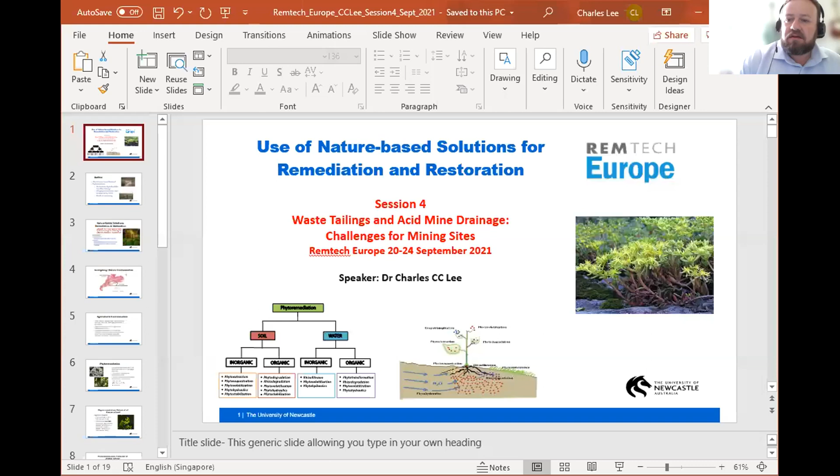You can stop sharing now. I would like to ask Dr. Charles Lee.

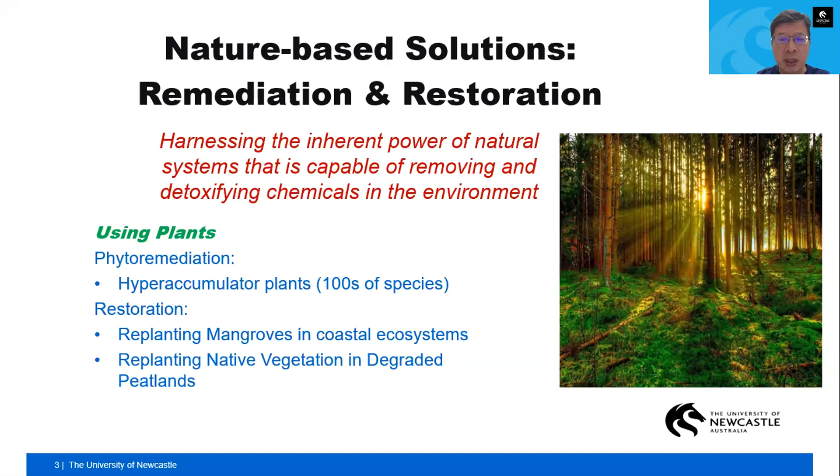The other part, restoration, which I don't have time to cover, is basically restoring damaged ecosystems. We are in the decade of ecological restoration from the United Nations Environmental Program, replanting mangroves that are heavily damaged from urbanization in coastal ecosystems. There's also work on degraded peatlands, especially in Indonesia, damaged from burning to plant oil palm plantations. We are replanting native peatland vegetation to restore the peatlands back to something usable. We'll focus on phytoremediation in this presentation.

We'll move quickly to China. A hot topic is in Guangdong province, a very large province in southern China. You must have been to Hong Kong, crossing over at Shenzhen, where Dongguan is, where most of your phones are made. Now we will go to the northern part, the northeastern part, where all the mines are. They've been around for hundreds of years, very old mines, and we have lead, zinc, and cadmium contamination for a long time. The other metals we find are in the Pearl River Delta.

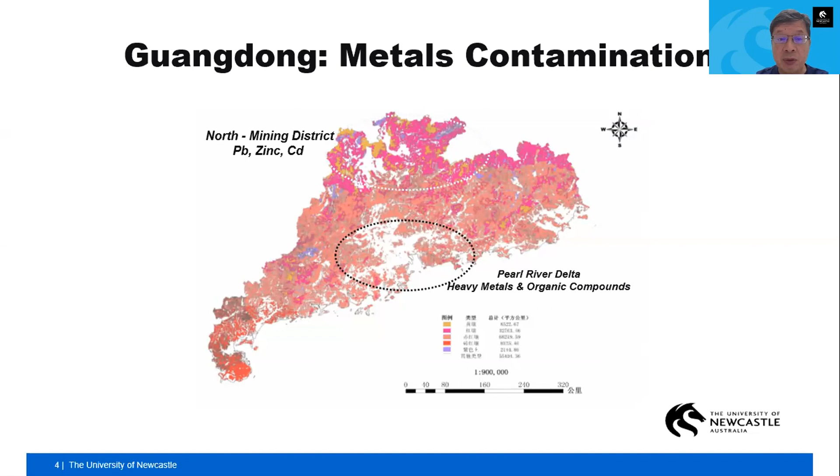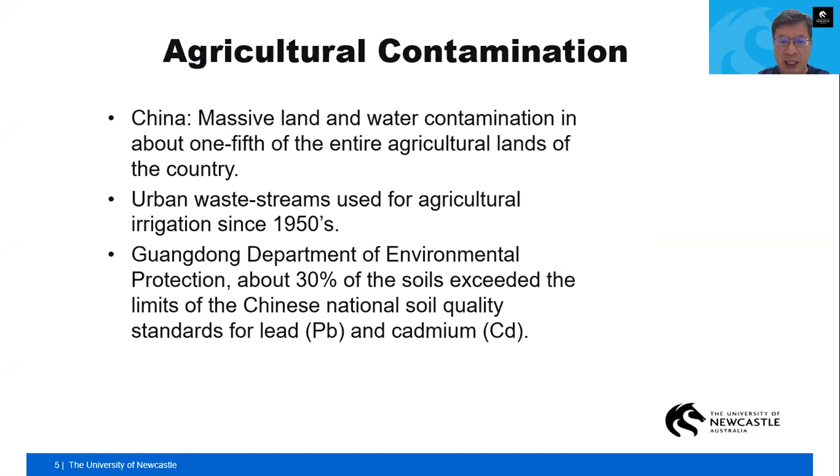They're mostly from industrialization, so we're moving up north where the old mines are, and also where there's agricultural fields. Unfortunately, in China it's estimated that at least one-fifth of the agricultural lands are contaminated, land and water, from urban waste streams, from irrigation back in the 1950s. The Provincial Department of Environmental Protection says about 30% of soils exceed the Chinese national soil quality standards for lead and cadmium. Very, very serious problem.

For this case, we are looking at hyperaccumulator plants. For those who are not familiar, they are basically able to accumulate about 100 times more metals, for example, than non-hyperaccumulator plants. So if one was to select these plants, they do not die from toxicity, but can uptake it.

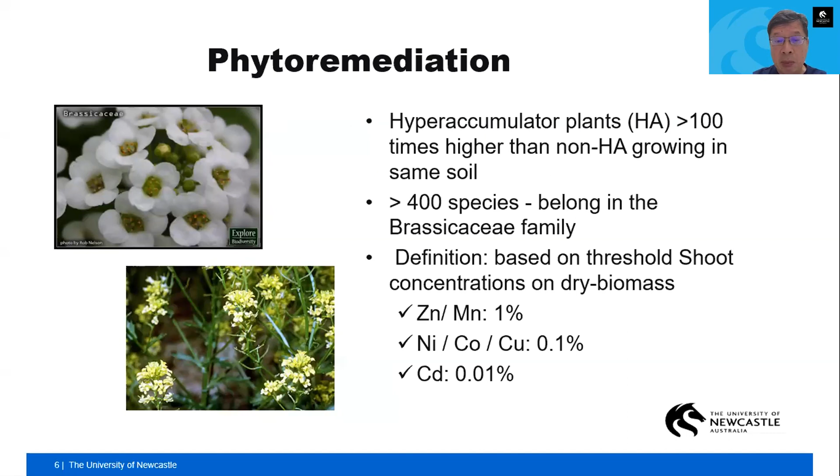A lot of the species belong to the Brassicaceae family. Again, when you test the shoots, the dry mass zinc and manganese can be as high as 1%, which is 10,000 ppm of these metals, and 0.1% to 0.01% for others—very, very high concentrations, but yet the plants are surviving. So these are really amazing plants, given by God for us to use.

This particular Sedum alfredii is a fern-type plant that is used in our remediation. It was found as a mining ecotype. So when we went to the mines, they are acclimatized to the high concentrations, and it grows in higher kind of regions, native to China, Japan, Korea, in the moist forested slopes, from 2 to 30 degrees, quite a range of temperature and elevation.

Originally found in the Zhejiang province, which is just next to Shanghai. Way back, the mines have been operating for 300 years in the Ming and Qing dynasty, extracting lead, zinc, silver in those heavily galena sphalerite ores.

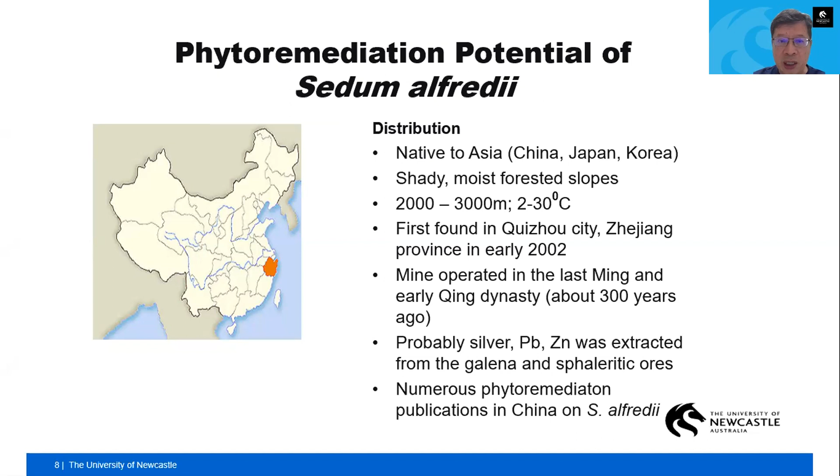It's not uncommon to find a lot of publications on using this fern for phytoremediation in China. When we look to be practical, you can't get all the farmers just to get out of the farms—they need to continue living in the villages. So the best way is to co-crop the fern with the maize or corn, and it does increase the phytoextraction of the metals in co-cropping.

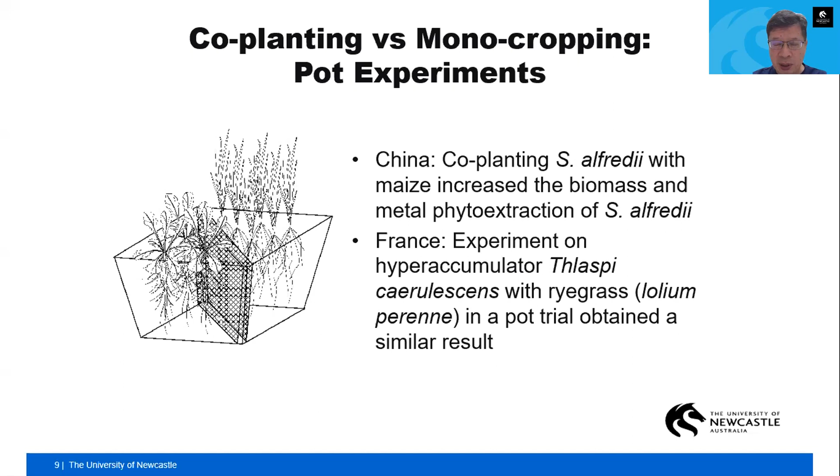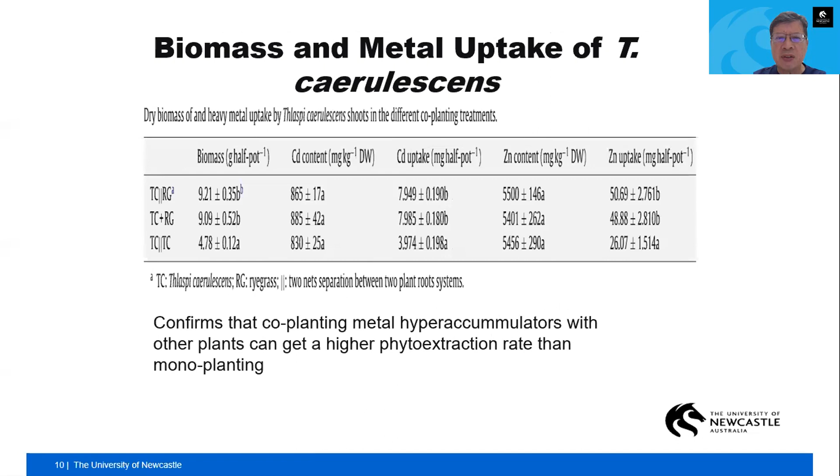Now, phytoremediation, we know, is nature-based. A lot of times we do not have the luxury of time and we want to get rid of contaminants quickly, not surprisingly. But nature-based solutions are good and not very intrusive by and large, though it does take some time. So we're looking at 5 years of data showing the soil concentration slowly decreasing.

We see the concentrations of, for this case, cadmium in the leaves, stems and roots of the maize, as well as, obviously, the fern, the Sedum alfredii, taking up the cadmium at very high concentrations in the plant. And co-cropping with the low-cadmium cultivar, the maize cultivar that takes up low cadmium, we have basically the co-cropping setup, which I'll show you a picture of later.

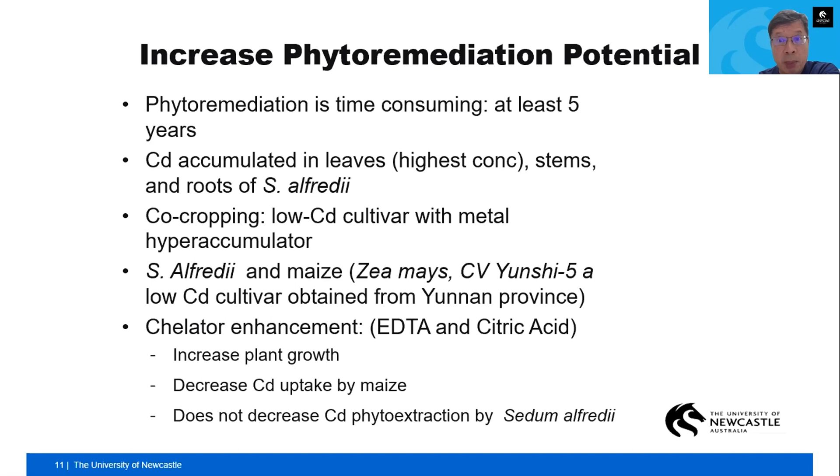Also, another additional experiment to increase the uptake of cadmium is, not surprisingly, to add EDTA as a chelator, which grabs the metal from the soil to make it available for uptake, and also citric acid. So we add these two ingredients in, and we see an increase in plant uptake because it has solubilized the hard-to-get metals like cadmium, zinc, and lead from the soil to be available for uptake by the plant. The maize will take it up, but of course the hyperaccumulator plant will just soak it up.

This is a typical field. So we have had a lot of pot experiments. Obviously, we take it from northern China, bring it to Guangzhou, which is quite far, to do the greenhouse pot experiments. They are successful, and it's started in the field experiments out in the village.

Now we just see some of these paddy soils. The rice is also grown there, and high zinc, cadmium, lead, and kind of alkaline soils also in that area. They've been using the mine drainage, unfortunately, for decades, so the metal concentration is elevated.

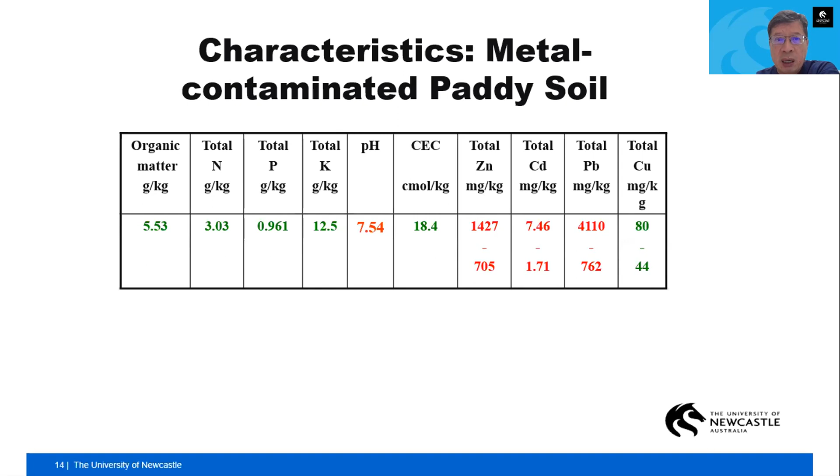Exactly the same slide, but you'll see more data of the soil as well as the rice. The cadmium is elevated in the rice kernel, whereas the lead and zinc seem okay. There's red flags meaning they're above the Chinese standards for rice, as well as for the soil for cadmium and zinc, whereas it's above the rice threshold for cadmium. So they're taking up very high cadmium in the rice, not surprisingly, as you may have heard that rice from China sometimes has elevated metals.

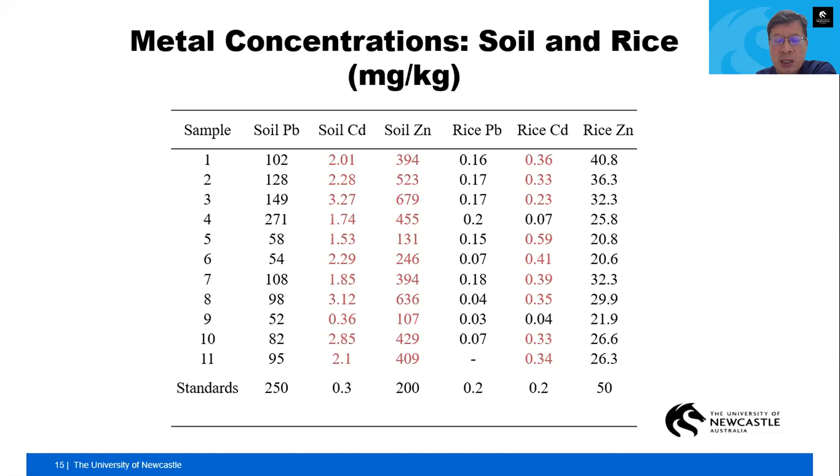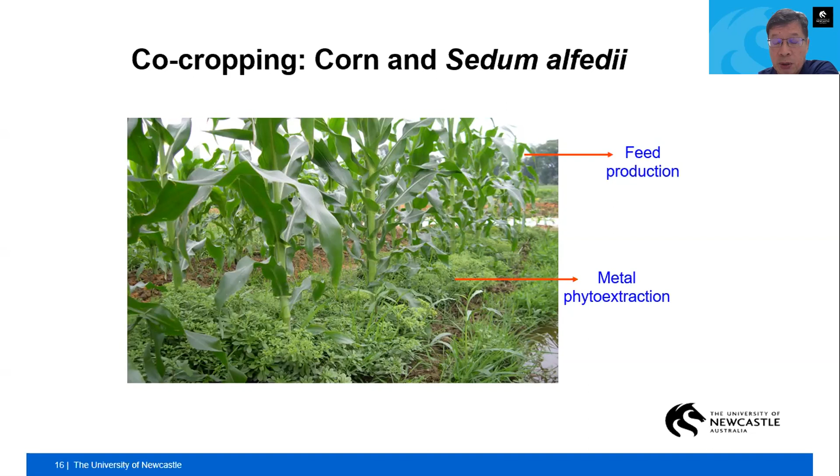This is a picture where you have the maize, or corn, with the fern, Sedum alfredi, as the bush underneath. It's a nice way to intercrop without disturbing the cropping and harvesting too much. The fern is harvested routinely to keep up the uptake of metals over time, and the high-concentration Sedum alfredi is dried. It's still high in metal concentration and needs to be incinerated, but the amount of dry matter incinerated is very low compared to digging up and burning the soil.

To wrap up, moving forward we have now scaled up to field trials in the villages themselves. Each village has a population of a few hundred, around 250, with very young children also living there - they have no way to go except to live in the village, which is very far up north. We are monitoring the cadmium in the maize and the fern.

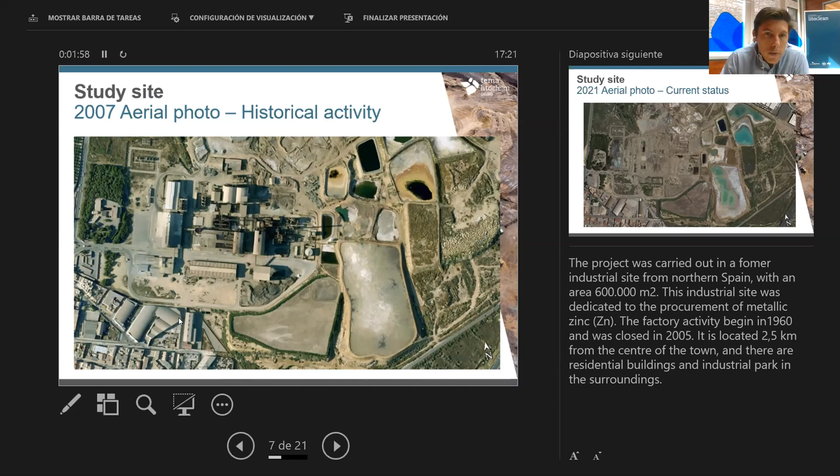It is located 2.5 kilometers from the center of the town, and there are residential buildings and an industrial park in the surroundings. As you can see here in the lower left corner of the slide, you can see this part with residential buildings and surroundings.

This is the aerial photo of the current status in 2021. You can see now there is no industrial activity, as it has been dismantled, but there is debris and a lot of old construction remaining.

Soil at this site became largely contaminated with zinc and other metals: lead, cadmium, and copper. These metals contaminate the soil and pose risks to human health and environmental ecosystems.

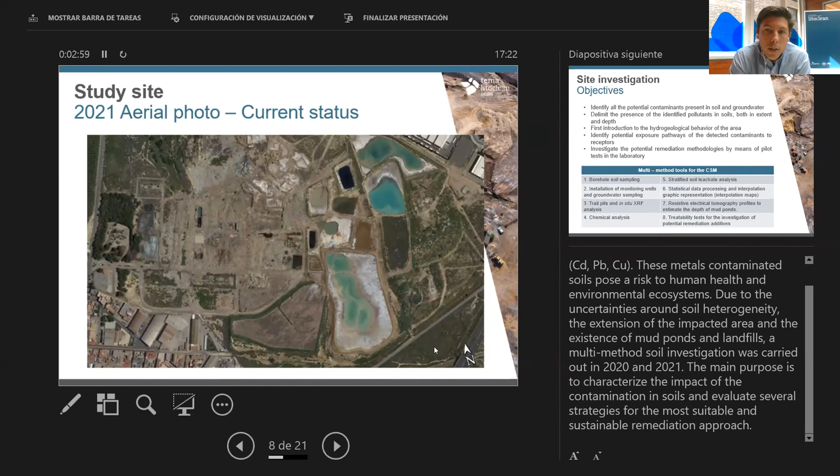Due to uncertainties around soil heterogeneity and the extent of the impacted area, and the existence of mud ponds and landfills, a multi-method soil investigation was carried out in 2020 and 2021 in two phases. The main purpose of this characterization is to characterize the impact of the contamination in soils and evaluate several strategies for the most suitable and sustainable remediation approach.

Our site objective, according to our client's research, was to try to identify all the potential contaminants present in the soil, delimit the presence of the identified pollutants in extent and in depth, and gain an initial understanding of the hydrogeological behavior of the area, which is really complex. We also aimed to identify potential exposure pathways of the detected contaminants to potential site receptors, and to investigate potential remediation methodologies by means of pilot tests in the laboratory.

The tools that we used for this analysis are borehole sampling, installation of monitoring wells, trial pits with our in-situ XRF analytical methodology, chemical analysis in the laboratory, stratified soil leachate analysis, statistical data processing and interpolation, graphic representation with interpolation maps, resistive electrical tomography profiles for the depth of the mud ponds, and treatability tests for the investigation of potential remediation additives.

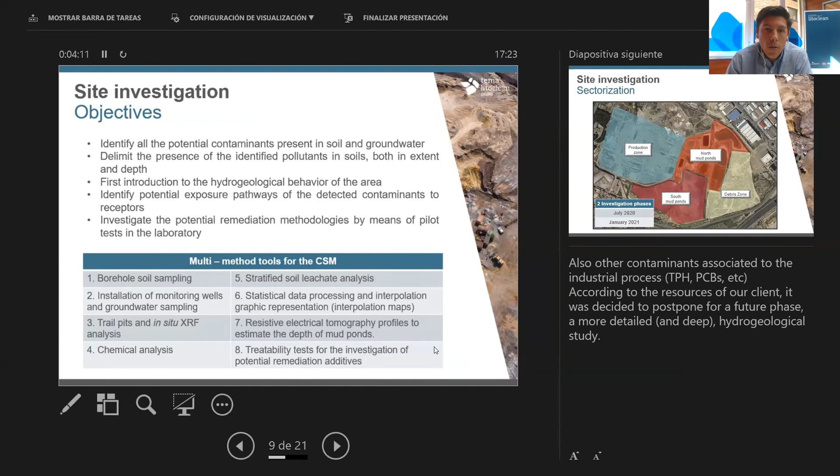We divided the investigation into phases: the first phase in July 2020, the second phase in January 2021. In the first phase, we sectorized the whole site because it's a big problem, so we decided to sector all the parts of the site: first as a production zone where the former activities were, the north mud ponds, and the south mud ponds debris.

As a result, we decided to design a specific investigation approach. For example, in the ponds, it's only possible to collect mud samples with an auger manually, in a safe way, so we decided to design a geophysical approach to know the depth of each pond instead of machine drilling. In the debris zone, after the first investigation phase, we decided to reduce the density of trial pits for the second phase due to the lesser presence of heavy metals.

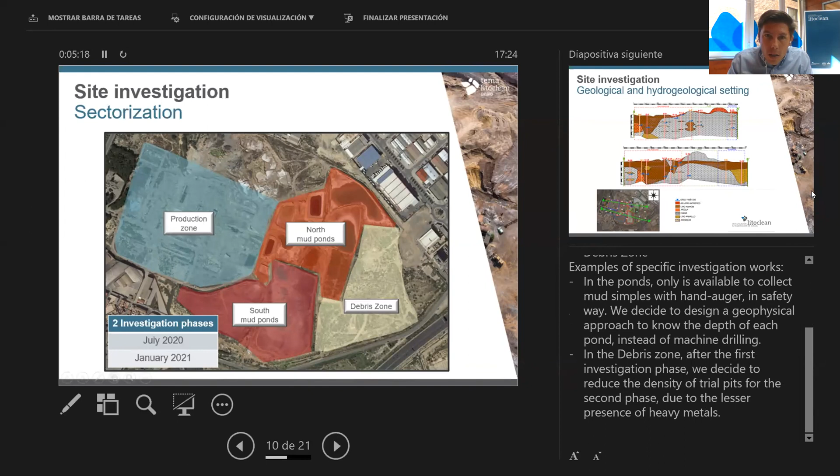As a geological or hydrogeological setting, this is the summary of the work done. The superficial soil level of the production and debris zone is constituted by heterogeneous fill from the industrial activity of the site. We identified the presence of low permeability materials, silt, or very low permeability materials underneath. According to the piezometric levels and groundwater characteristics, no continuous groundwater table was detected in the subsurficial level. A potential deeper aquifer was not investigated.

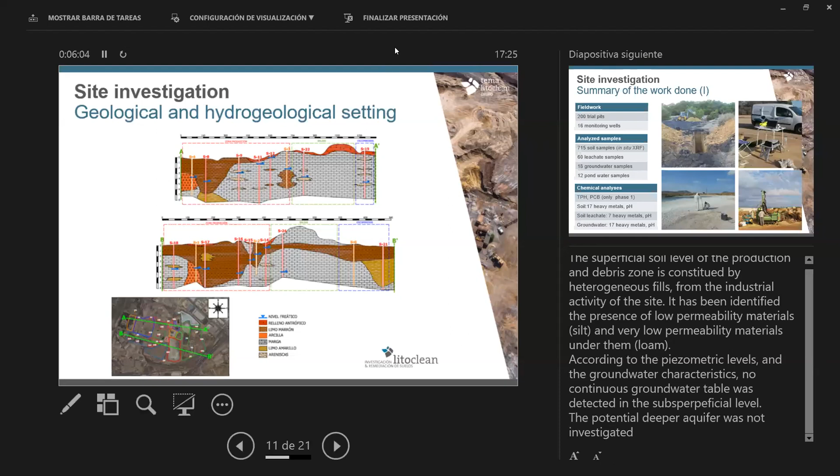For the site investigation, a summary of the work done in the field: we made 200 trial pits with 16 monitoring wells, and analyzed 715 soil samples with our in-situ XRF equipment, 18 groundwater samples, and 12 pond water samples for the mud ponds. You can see some pictures here.

The chemical analysis, just in phase one, included TPH and PCB in soil, 17 heavy metals in soil, soil leachate with 7 different heavy metals, and groundwater with 17 heavy metals and pH.

Just to understand the concentrations we found: zinc was found in almost all the samples, up to 250,000 milligrams per kilo, with these samples showing 27% zinc due to the former activity of the plant. Copper's presence is linked to the zinc present, but is significantly less in concentration, up to 15,000 milligrams per kilo. Cadmium and lead were heterogeneously present but up to 1,500 milligrams per kilo, lesser than zinc and copper.

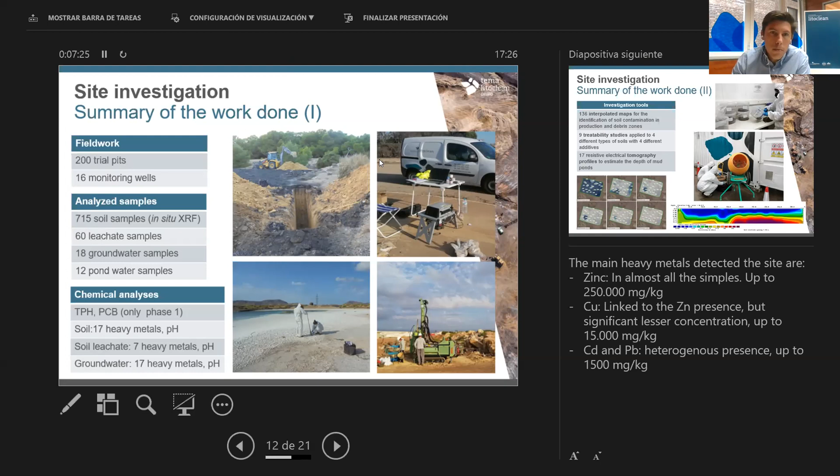We continue with the interpolation information. We have made 136 interpolated maps to understand and define all the heavy metal contamination at the site. We made 9 treatability studies applied to 4 different types of soil with 4 different additives. To understand and find the depth of the mud ponds, we made 17 resistive electrical tomography surveys. As you can see in this part of the slide, this is one of the profiles we can make within a specific company.

The results of the interpolated maps have allowed us to delimit the heavy metal contamination. As we can see later in another slide, the results confirm the use of stabilization additives as a valid remediation technology. In the north and south ponds, the base of each mud deposit was identified.

Results. The result we have here after this investigation is that the contamination is concentrated in the production zone in the upper layers of the soil, except in very specific locations in the production zone, so the effect by metals has been delimited in depth.

In the debris zone, part of it is significantly less contaminated, mainly associated with the waste management process. They have a lot of problems with debris.

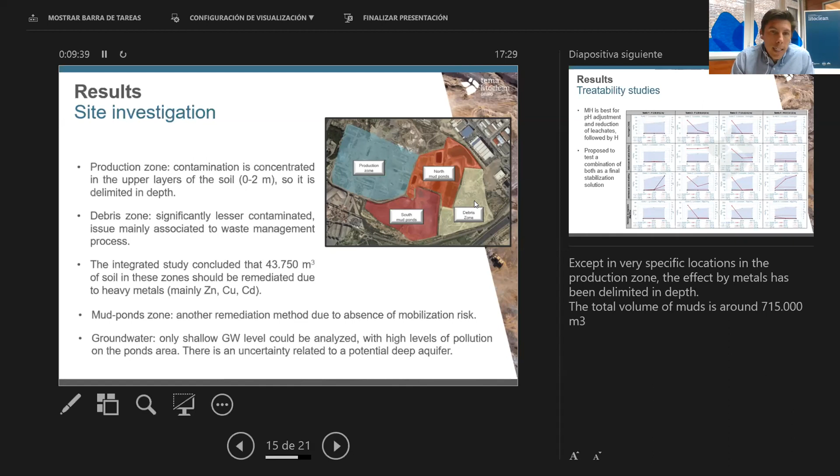Groundwater: only shallow groundwater levels could be analyzed in this part of the investigation, with high levels of pollution in the ponds area detected by the piezometer monitoring wells we installed on site. There is an uncertainty related to a potential deep aquifer.

In this slide, we present the treatability studies results, a brief summary of the treatability tests. One of the 4 additives, magnesite, has been shown to be the best option for pH adjustment and to reduce the leachate. Concrete has also shown very good results. For our next phase, we will propose a final pilot test with different combinations of additives.

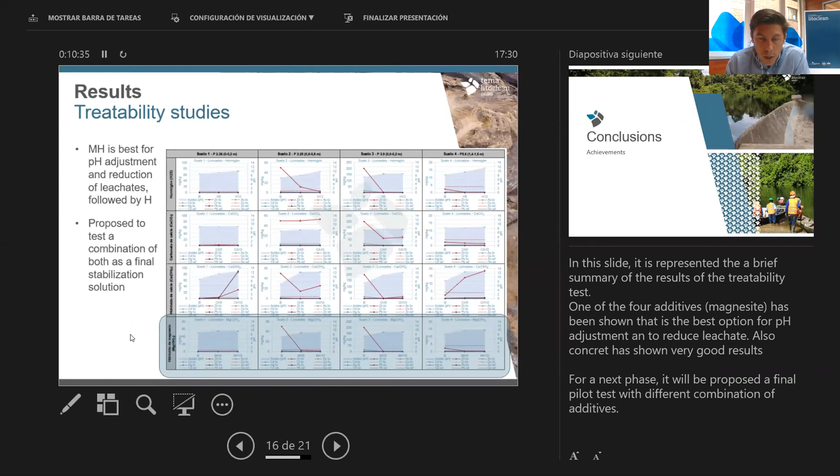This is the part of the treatability study with magnesite showing the results. You can see that all the leachate levels are down. So, for each different type of soil, we can see that this additive is the best option for the treatability of production zone contaminated soils.

Our achievements: thanks to the multi-method approach, we consider we have achieved the following. First, the presence of other potential contaminants beside metals was discarded, like PCBs or TPH. We validated the XRF results in comparison with laboratory chemical analysis, so we could make a lot of analysis in situ and make some decisions on the spot during the field work.

Identification of heavy metal soil contamination and depth distribution, detection of shallow groundwater contamination especially in the pond area, identification of heavy metal non-leaching concentration in soils aiming to select a specific remediation option like selective excavation. Determination of mud pond thickness, important to understand the volume and composition from the geophysical and metal analysis—just possible thanks to the geophysical work. Selection of a specific remediation treatment for each type of area, and calculation of the soil volume to treat from the interpolation maps.

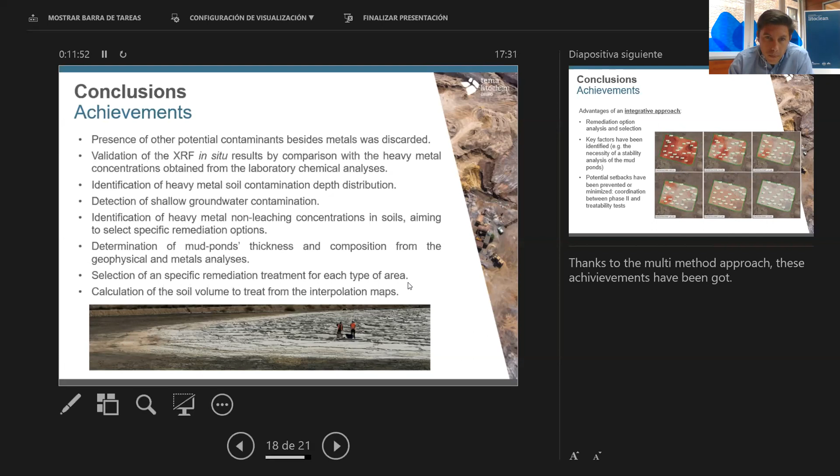So the advantage of an integrative approach is that we can do remediation option analysis and selection during this investigation work. Key factors have been identified, for example, the necessity of a stability analysis of the mud ponds, and potential setbacks have been prevented or minimized. Thanks to the coordination between phase 2 and the treatability tests, we can advance the timetable for our client.

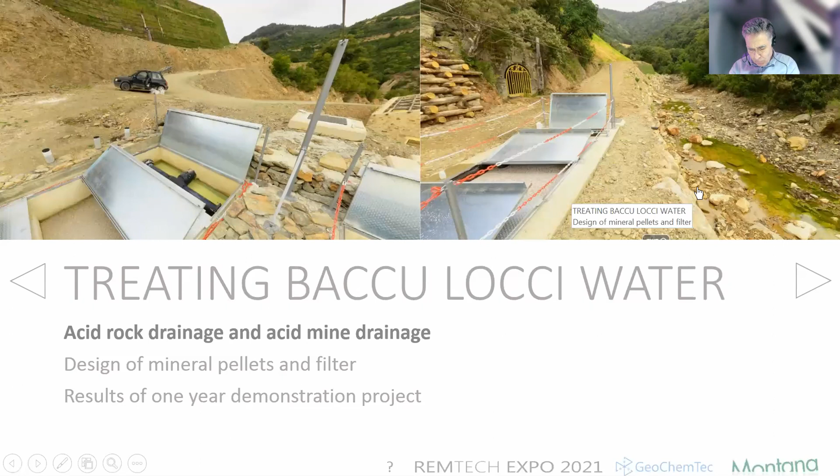Now we constructed a filter which consists of a number of sectors. These are concrete basins. We filled this filter from the influent side on the left to the effluent side on the right with pellets. At the influent side we have slowly reacting pellets, and at the effluent side, highly reactive pellets.

Laboratory and field column tests showed that aluminium precipitates at low pH and forms a gel, which blocks the pore space between the pellets at the influent side. It was noted that cadmium was the last to precipitate, at very high pH, on pellets at the effluent side.

So we used different pellets of different size and reactivity. The large and slowly reactive pellets at the influent side provide room for aluminum gel precipitation. The small and highly reactive pellets at the effluent side can raise the pH enough to allow for the precipitation of the cadmium on the pellets.

The sectors are alternately open at the bottom and the top, which allows for a vertically winding flow. Should the permeability of the filter decrease due to the precipitation of the aluminium gel, we first see a rise of the water level and an increase of the pressure. And if the sectors become blocked, there is also a possibility for bypass.

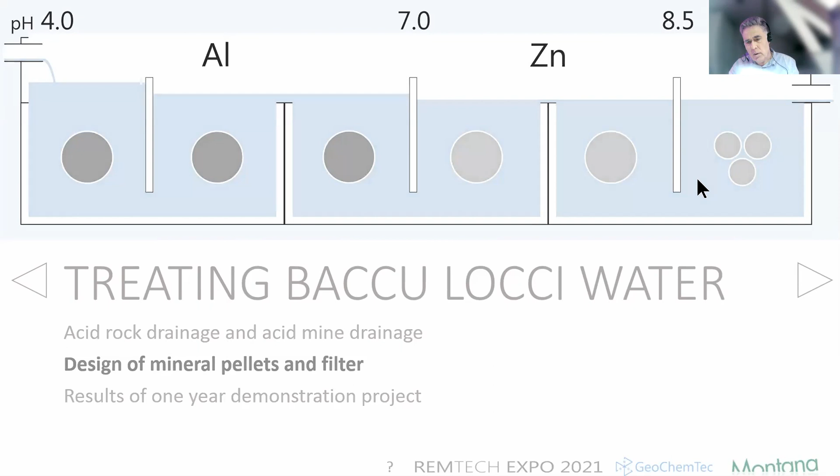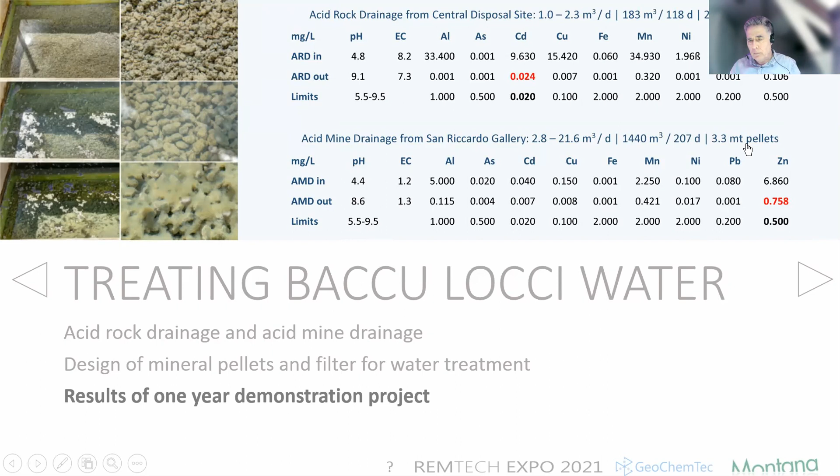Now, the idea is that if you have lots of small waters that have to be treated, you can best do that with local operators, and you want them to understand what they are doing. The mining water treatment with our pellets is defined by the volumetric flow rate, the concentration of the metals, and the size of the filter that you have at your disposal.

The local operators can readily obtain these values and then use them to prepare pellets of different size and strength on site. By varying the volumes of the different types of pellets in succession in the graded filter, like I showed you before, they can aim for maximum treatment efficiency.

And the problem owner, in this case the municipality of Villaputzu San Vito, which is responsible for the treatment of the water, can provide an incentive for maximum efficiency when they pay per volume of water treated instead of the amount of reagent used.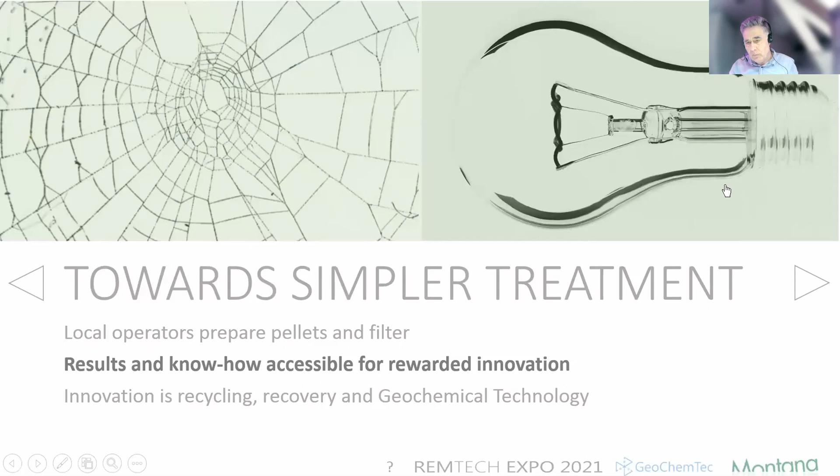The municipality has granted us a new opportunity for another year of treatment, and maybe we can use this occasion to find how the spent pellets material can be recycled a few times before final disposal. We also like to know how the metals that are purified, concentrated, and immobilized on the pellets can be best leached and recovered. And then finally, geochemical technology is about treatment with minerals that better blend into the natural environment.

We might like to investigate in the future how the current filter installations of concrete and steel might be replaced by more natural pellet filters, which can operate on a larger scale and remain stable in the longer term. Hopefully, we will have a chance to report on this in a future presentation.

Thank you very much, and keep it simpler with geochemical technology, I would say.

Thank you, Mr. Hans. Now we have a presentation from Beatriz Watts. Please, Beatriz, introduce yourself. Yeah, hello. Just stop share screen, Mr. Hans, please. Yes, I'm. Okay. I use.

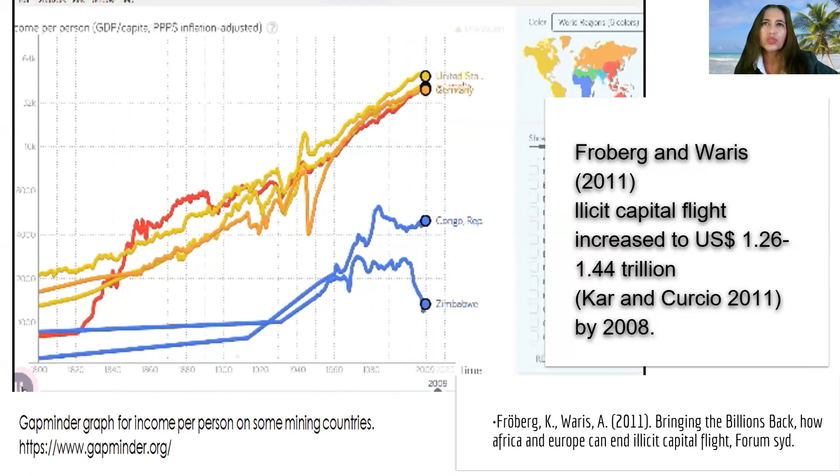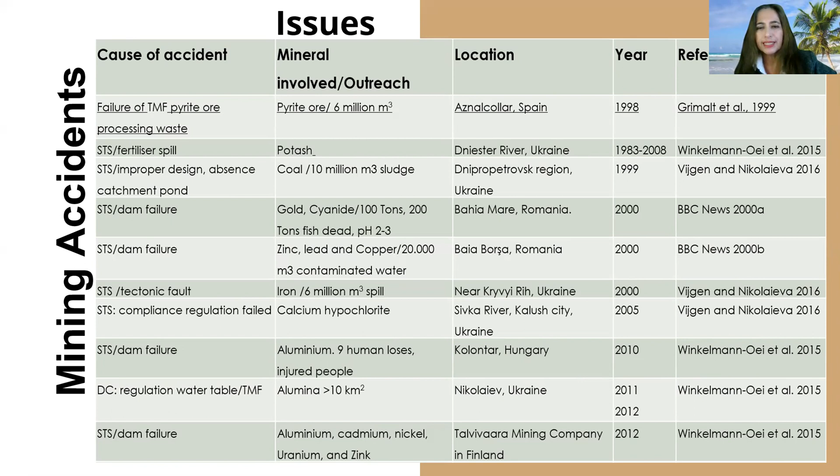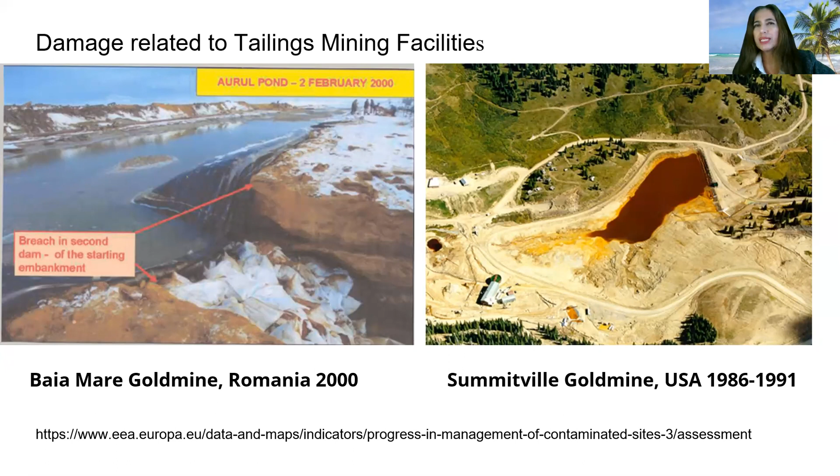Here we can see two big problems that happened. One was in Baia Mare in Romania in 2000. This was an accident in a gold mine. Also, on the right, we can see a gold mine in the United States where the government had to do the cleanup because the company was in bankruptcy.

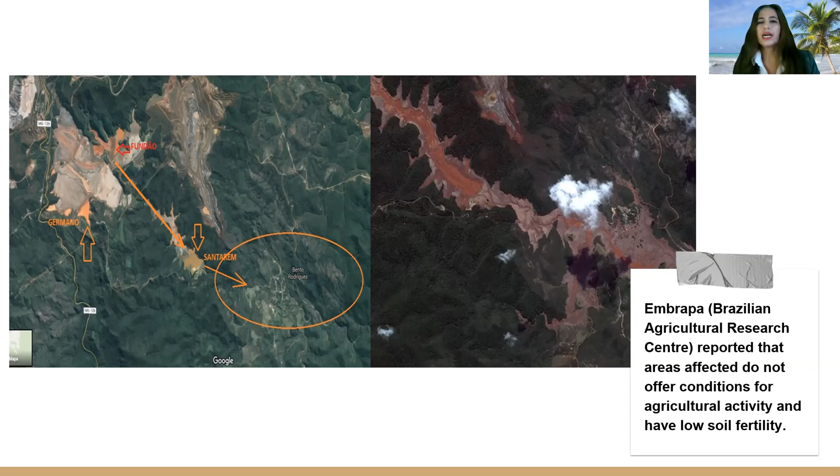Here we can see a disaster in Brazil. This was in 2015, due to a problem with an upstream dam rupture and a failure in alarms around the community. Later, there was another accident in 2019 in Brumadinho, for which the Brazilian legislation changed, and this new law asks to dismantle these upstream dams, which has been related to many of these accidents.

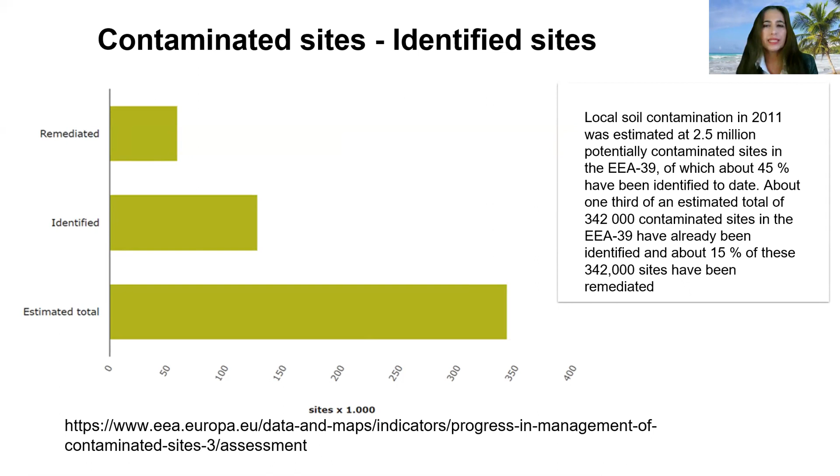This is also a report from the European Commission. In 2011, 2.5 million potential contaminated sites in Europe were estimated, and 45% of these were identified. 15% has since been remediated, according to the European Environment Agency. This European Commission has created a series of documents, such as the best available techniques reference document for management of tailings and waste rock.

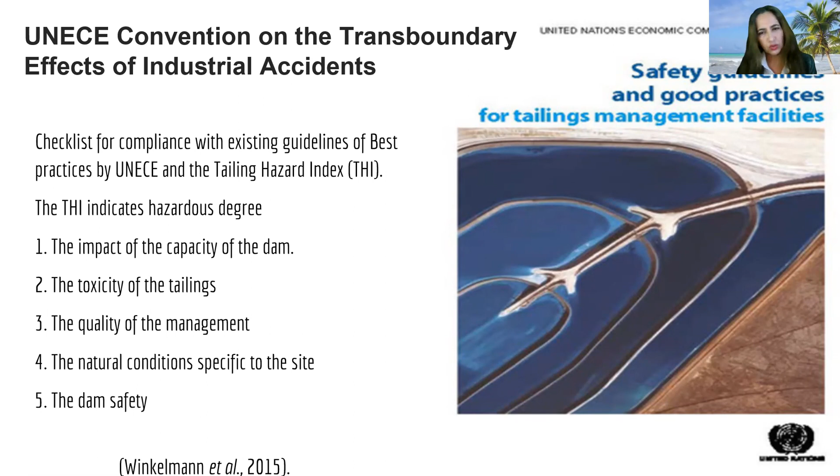The UNECE Convention on the Transboundary Effects of Industrial Accidents has made a checklist for compliance with existing guidelines for best practices. Companies fill up the checklist, and the government checks the index. This tailing hazard index is calculated according to 5 main indicators: impact capacity of the dam, toxicity, quality of management, natural conditions, and dam safety.

Because of this structure, we are going to follow this format for the checklist we propose today, to expose a series of problems to be addressed and the measures that should be taken. First, consultations, to ensure that they are fair and that the people involved are not in danger. This matters because in Latin America there have been a large number of reported cases of environmental defenders who have been killed.

Planning and pre-construction: the problem is that in many cases insurance is not placed and a contingency plan is compromised because of the money. If the company has mandatory insurance or a protection instrument, such as a captive, it will protect them and provide them with money in case of a disaster.

Another problem is that tax revenue is not properly addressed, and this is not really reflected in the local community's well-being. Companies have to pay a fair tax, and not only them but also subsidiary companies, because they change names to avoid this. So it should really apply to everybody in the chain.

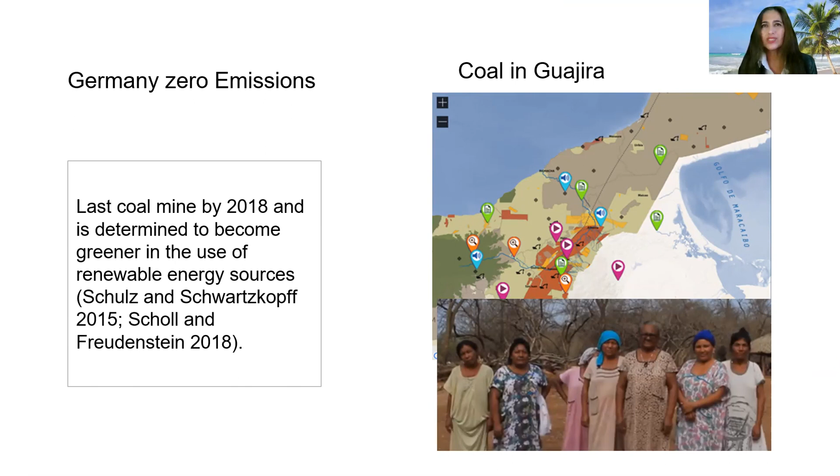Another big problem we have to address is planned obsolescence, which is the practice of producing machines designed to have a certain lifespan and then need replacing, simply because it's more economically attractive. That practice really has to be stopped.

The occurrence of minerals has a limit, and overexploitation causes reserves to become exhausted. So mining waste should really be used as a resource to assure maximum mineral extraction, by reprocessing minerals, using them as landscape materials, aggregates, salt additives, etc.

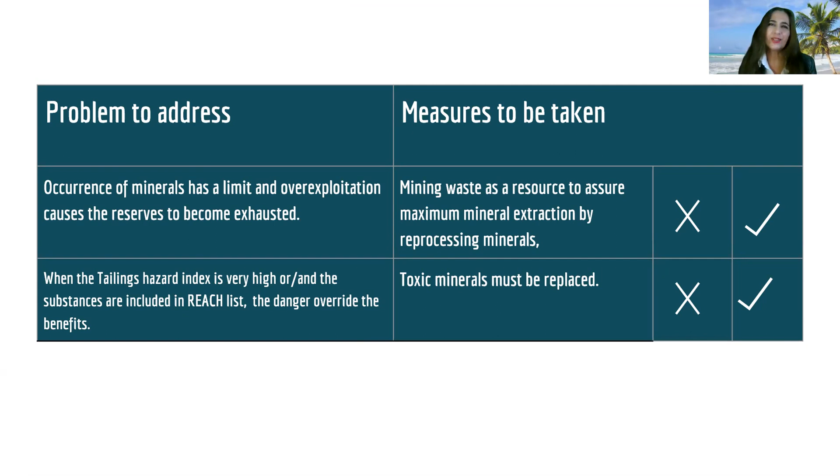And if this tailing hazard index is very high, or these substances are on the REACH list, which is very bad, the danger of the substances overrides the benefit. So they should really be stopped.

This has already happened with the case of mercury. The Minamata Convention came into force in 2017, and mercury is being replaced.

In emergency planning, one measure that must be complied with is addressing the fact that communities are sometimes not aware of these dangers, so they cannot react properly in an emergency. So the community must be involved in preparation drills.

Also, because they are present on the terrain, communities could serve as local witnesses and could be monitoring with biological markers or some sort of kits that could help detect if the weather is changing, or if there is any danger in the air or water.

Another problem in this part of the emergency planning is that there are no basic services for the community after one of these disasters occurs. So it should really ensure basic services after a disaster.

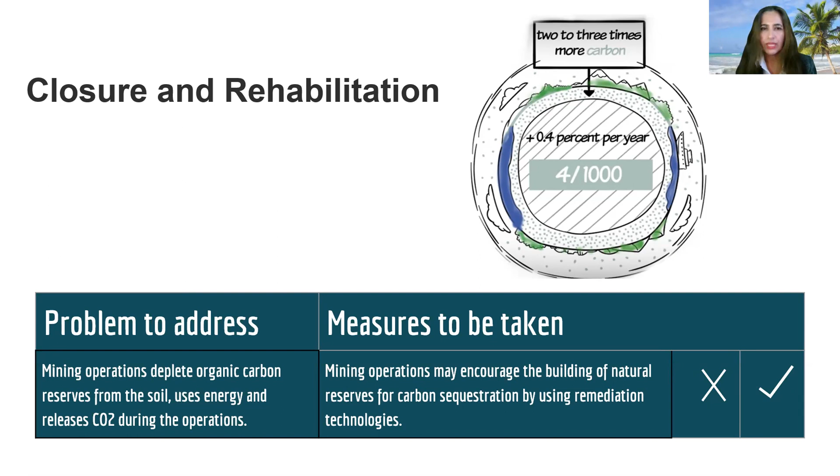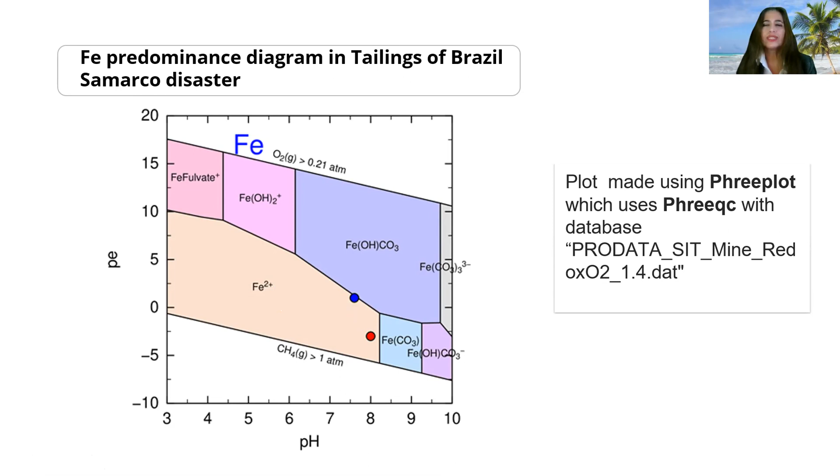But thanks to the fact that plants and also a vast number of fungi and bacteria genera have the ability to degrade pollutants, it's also possible to use these plants to remediate the site, as we saw in this phytoremediation chart. We will probably see in REMTech that there are a lot of plants that could do this work.

Beatriz, we don't have much time, we need to finish as soon as possible. I'm finishing, I'm finishing, okay.

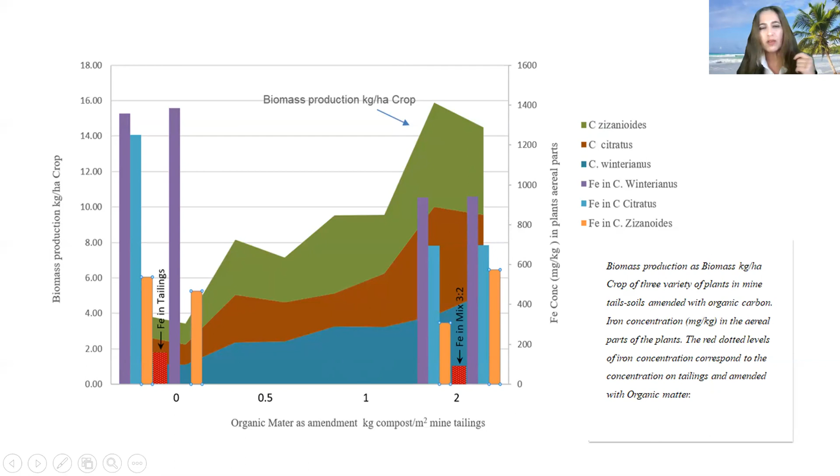I'm finishing, yes. And this is like the evidence that it is possible to produce biomass even in a very hostile environment.

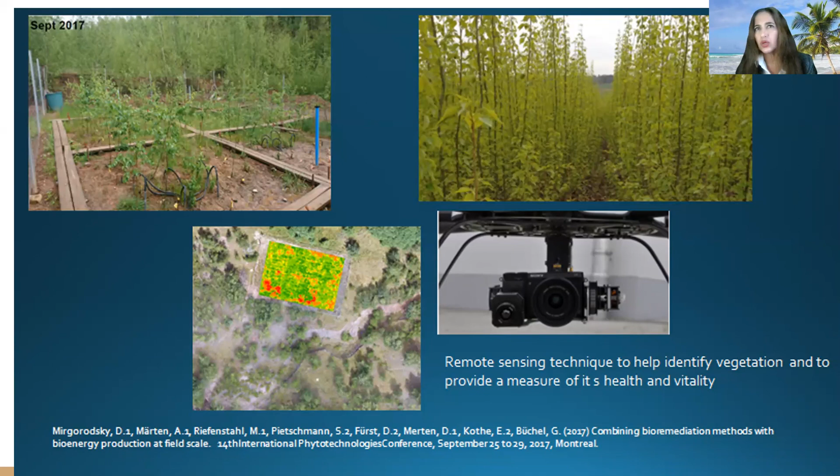And that is all, thank you very much. I want to acknowledge some of the people who helped me somehow to do this work.

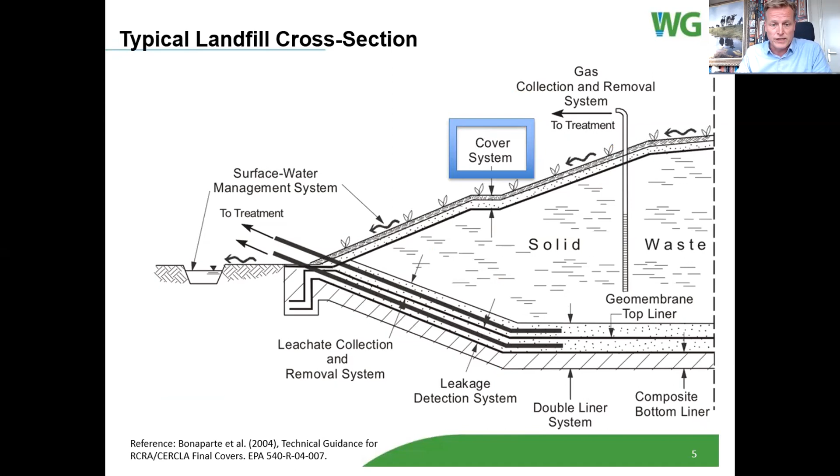As mentioned, a couple of slides on how the technology is working. Best explained how closure turf works by comparing a traditionally closed cover with a closure turf constructed cover.

A traditionally constructed cover consists of a waste body and a soil leveling layer. On top of that soil leveling layer, there will be mineral layers and geomembrane sealant layers, eventually topped with geocomposite drainage layers. Then on top of that, there will be about 50 centimeters to a meter of topsoil and a vegetative layer.

If we look at closure turf, the construction up into the sealant layer - with the intermediate soil cover to level out the site and the sealing membrane - is identical. Then on top of the geomembrane sealant layer, instead of a meter of soil, there is a synthetic engineered turf layer, topped up with a specified sand infill to generate optimal non-erosion conditions.

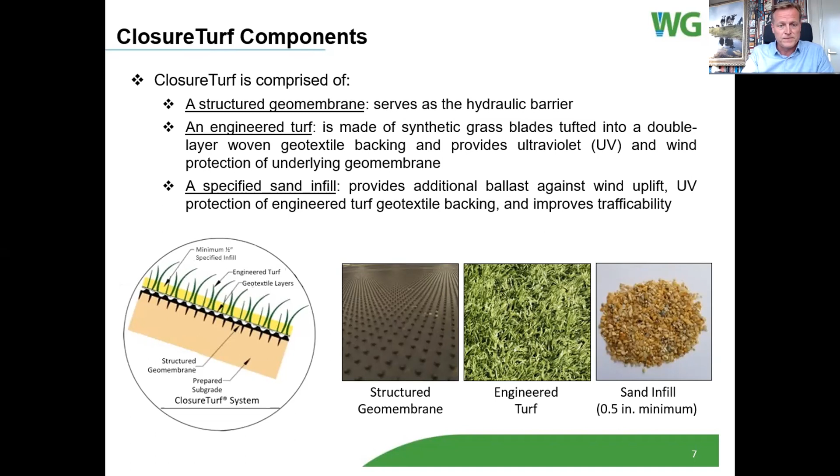I'll come to the benefit of that from an ESG aspect in a minute.

First, a slide here on a tailings site - Chevron refinery residue tailings in California, closed last year, about 80 acres, and fitting naturally within the environment. So here, not a green grass was chosen, but a tan brown type of material was chosen.

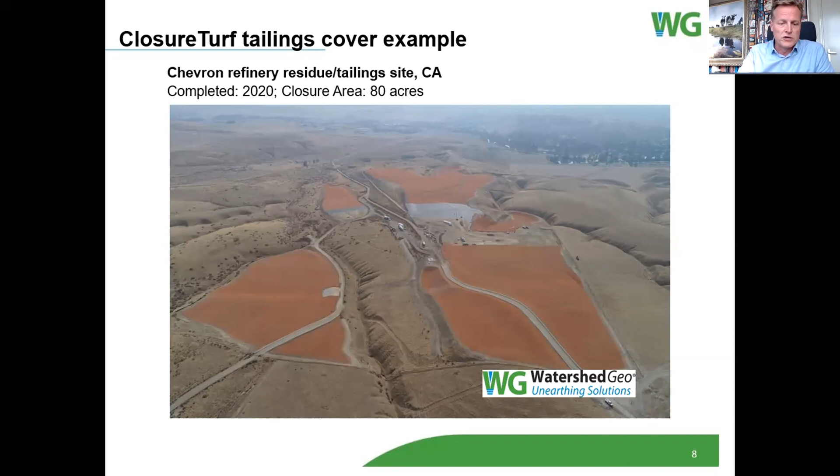So before turning to ESG specific aspects, I'll turn to the other technology of this presentation, being PowerCap - a solar-based solution to go hand in hand and along with synthetic capping of these landfill or industrial waste residue places.

Actually, the system was developed particularly to do no harm, to not penetrate or damage any of the underlying sealant layers. So what you're looking at on the left side picture is an anchoring strip, the back side of an anchoring strip with studs or anchors specifically designed to hold with the blades of the synthetic grass and the underlying sand infill.

In the central picture, you see the top side of the friction strip that is mounted with a rail, and on top of that rail, modular panels are being mounted. So a very lightweight system that is placed on ClosureTurf and is anchored by friction in practice.

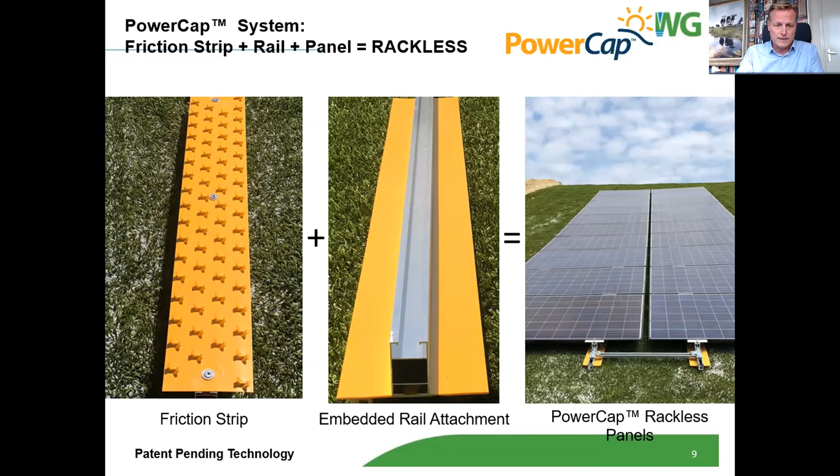One advantage of such a system is that it's lightweight, and it can be placed modular, slightly tilted or flat laying. One of the big advantages is that you can reach a very high density of these panels, of the energy yield raised by these panels, where many industrial sites, waste residue sites, landfill sites, but also tailing sites have looked at renewable energy.

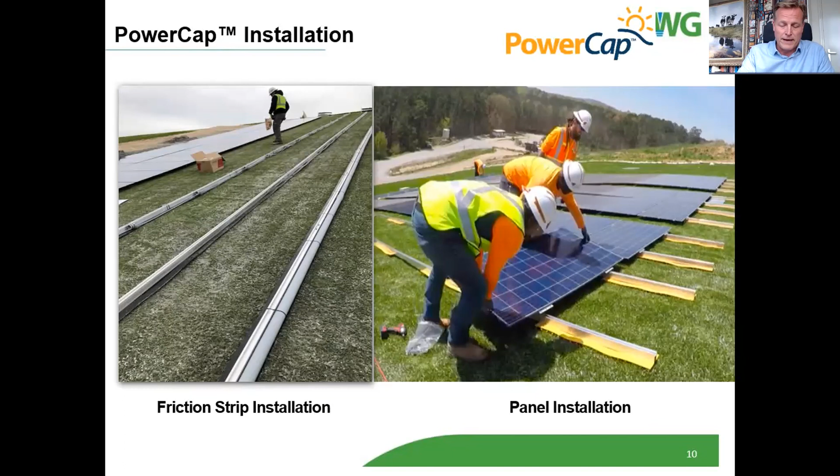Then turning to the heart and the ESG impact of ClosureTurf and PowerCap and performance characteristics. As we all know, ESG stands for environment, social and governance, and our systems at Watershed Geo particularly focus on the environmental part, not leaving out the fact that depending on the site location and the strategy and goals of a company, social and governance aspects can also be influenced.

I will mostly address environmental aspects now, and as time is limited, I will only address a few.

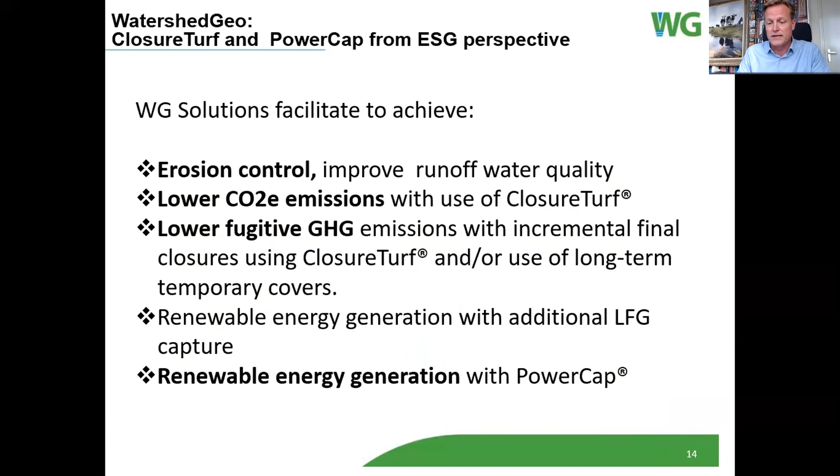I'll talk a little about erosion control performance, avoidance of hazardous leachate water, improvement of runoff water quality. I'll highlight a little bit on lowering CO2 emissions and fugitive gas emissions. And finally, I'll address renewable energy generation, as with PowerCap, as it can be done on industrial waste sites.

On hydraulic performance and erosion control, even though we've been out there for almost 15 years now, a lot of testing had to be done on all aspects of the system, including the hydraulic aspects, as here in a TRI facility in South Carolina, where a 3-horizontal-to-1-vertical slope was mimicked, and rainfall events were simulated at intensities of 2 to 6 inches per hour in sequences of 20 minutes, so between 6 and 15 centimeters per hour.

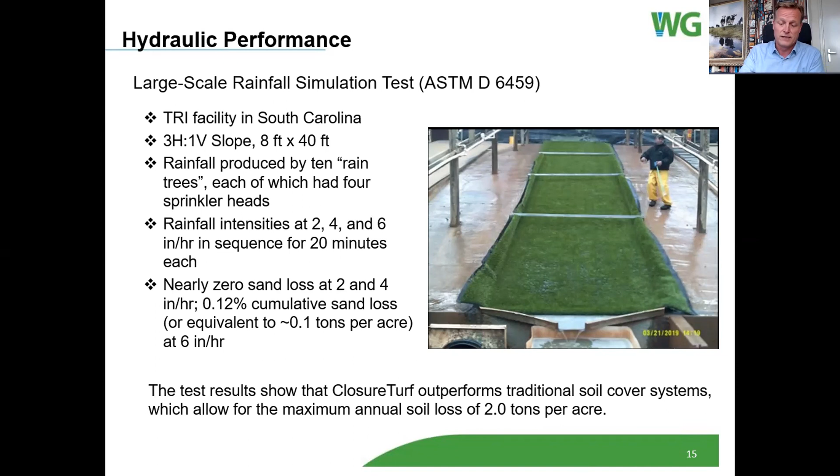That type of testing led to a loss of soil or sand infill at these slopes of about 0.1 ton per acre at the 6-inch-per-hour rainfall event, well within the threshold allowed under EPA conditions in the US of 2 tons per acre. But this is very important if you have heavy rainfall or erosion events, as you would in the US, for instance during hurricane season.

Another example is a phosphate stack. After the company operating the site was seized, it was transferred to the government and became a US EPA Environmental Protection Agency Superfund site, with a huge problem of acid-rich, nutrient-rich water seeping into the stacking ponds and potentially into the surrounding environment. Already up to 700 million gallons of water had to be treated, and the government was desperately seeking ways to remediate that site.

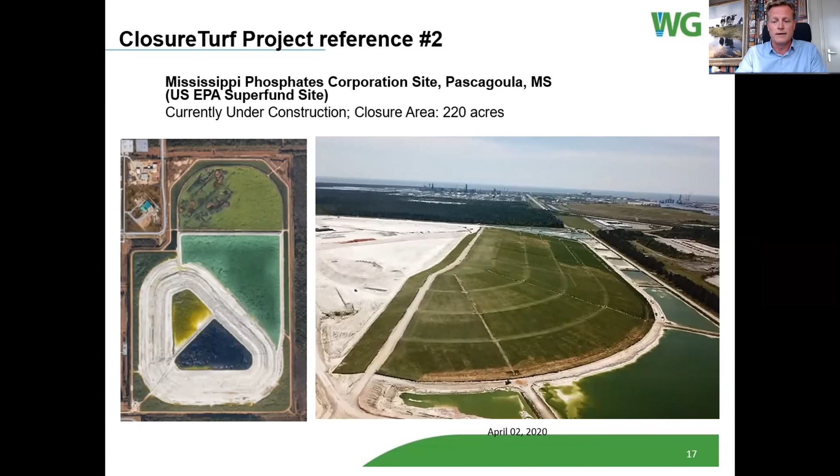So they decided to choose ClosureTurf to close off that site. Last year we completed the first phase of a 200-acre closing, where now for each heavy rainfall event we save about 9 million gallons of water at that site. Not only was water saved, but through this installation method, over 100,000 truckloads of soil were saved and over $6 million in installation cost, as opposed to installing a traditional cover.

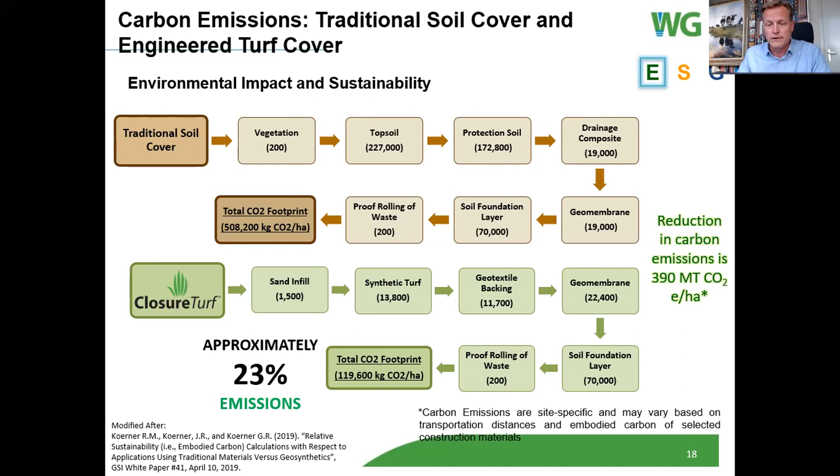Talking about the carbon footprint associated with installing a traditional cover versus this closure turf cover, this has also been studied by the famous Koerner family, leading persons in the geosynthetic sector. They calculated that a traditional soil cover installation would have an impact of little over 500,000 kilograms of CO2 equivalent per hectare, whereas closure turf would be installed at only 23% of that, being 119,000 kilograms of CO2 equivalent per hectare, saving 390 metric tons of CO2 equivalent per hectare in that particular case.

So I've talked about the quality of water and avoidance of leachate, and about transport movement and borrow soils. Another ESG aspect we influence is in landfills, municipal waste landfills, or industrial waste sites with a high organic component, which is the avoidance of fugitive or greenhouse gas emissions.

What you're looking at is an output screen of a model based on IPCC values and the SWICS protocol, which shows that in a standard well-operated landfill with a gas collection and control system but no final cover in place, still 0.3 standard cubic meters per minute per hectare of fugitive gases emit into the environment, or 155,000 standard cubic meters per hectare per year. Of those emissions, about 50% is methane, and according to the SWICS protocol, about 31% of this methane is oxidized in the cover if no cover is placed.

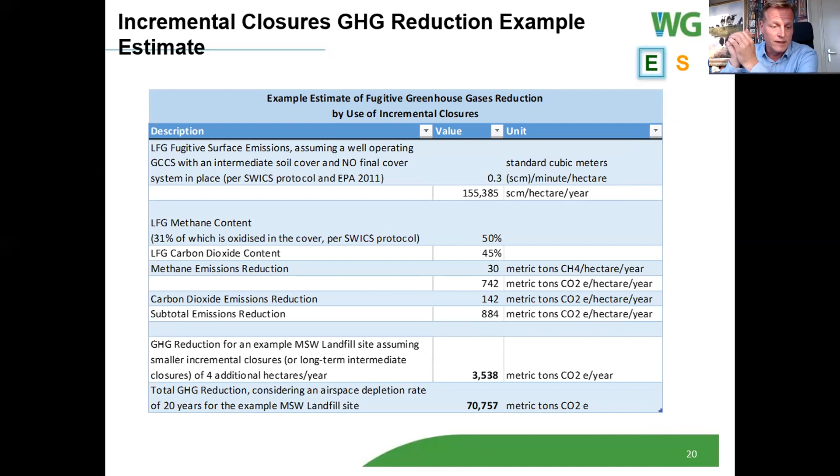That would require a lot of installation crew to come, but installation of closure turf can be done by a relatively simple crew. By doing that and making incremental closures, about 70,757 metric tons of CO2 equivalent could be saved in this particular example over a 20-year lifespan period on a 4-hectare landfill.

With industrial process firms, but also mining firms, having a high energy consumption and goals set within their own companies to become less dependent on fossil fuels to run their operations, and sometimes to become carbon neutral in their operations, adding solar technology or power cap technology to that industrial waste site, landfill, or tailings, if it's suitable, will not only help the company raise green energy for their own operations, but could also help them generate income to maintain that tailings site.

Instead of only creating a liability, they could make it an asset in cases where it's possible and beneficial - an asset that would pay for the maintenance, or even serve as a supply to, for instance, local communities. And with that, I come to the end of this presentation, where we as a company had a closer look at how we impact ESG.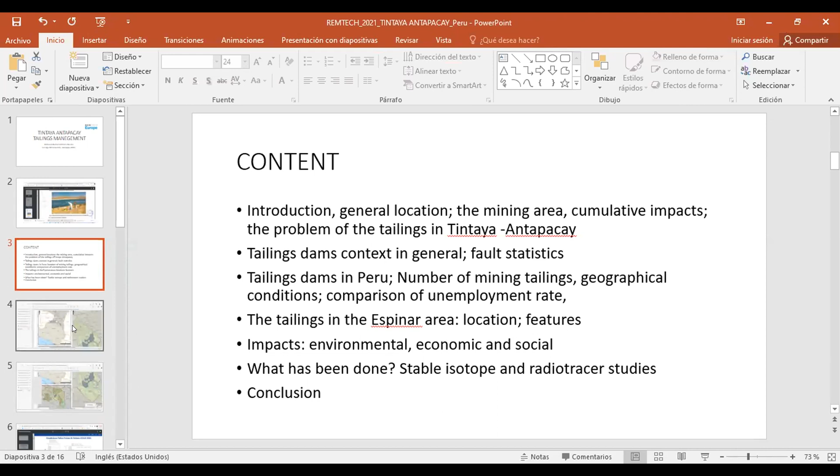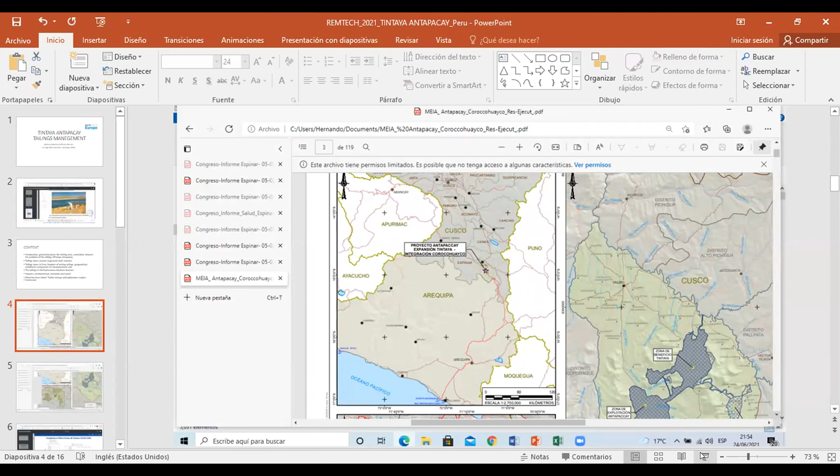This I show in these slides. I put in these maps the location of the mining area in the southern region of Peru. It's in the department of Cusco, province of Espinar, alongside the extension of operations in activity.

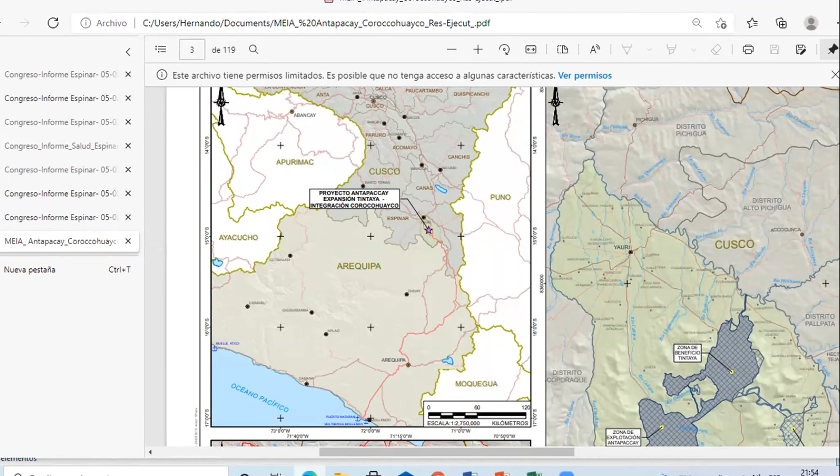On the next slide, the left side shows the different districts involved in the mining environment, and on the right side you can see the detail of the entire beneficiation zone, the Antapaccay operation zone, and the new project called Coroccohuayco integration.

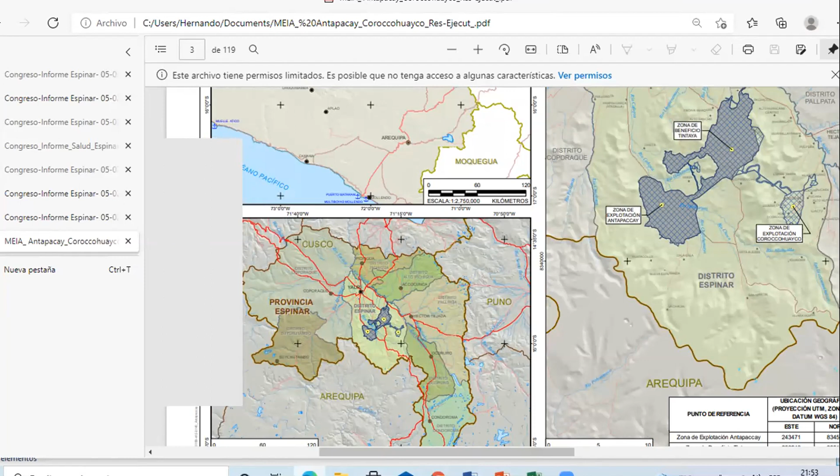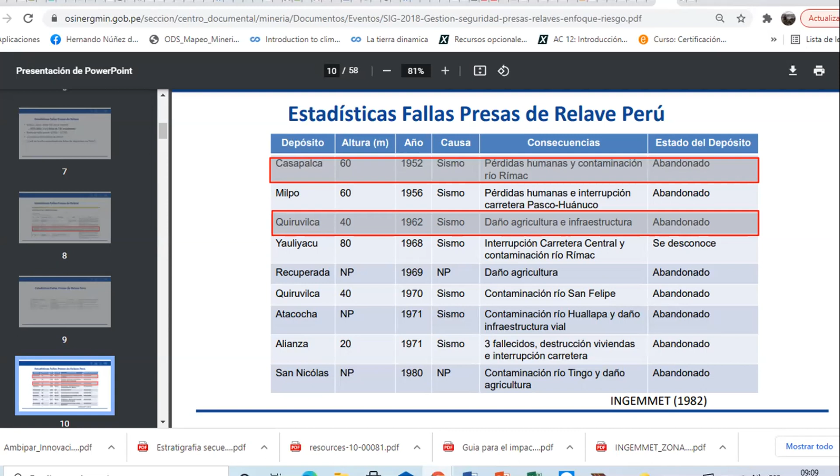It's important to consider the geographical conditions in the mountain region, because we have dry climate, strong sunshine, heavy rains, constant winds, and the transport of dust from tailings dams occurs and can contaminate large areas.

The tailings in the mining area of Espinar. I show the locations in the satellite image with the location of two tailings dams in the Espinar open pit mining area, where the project areas are delimited with red lines, the rivers whose waters have been polluted.

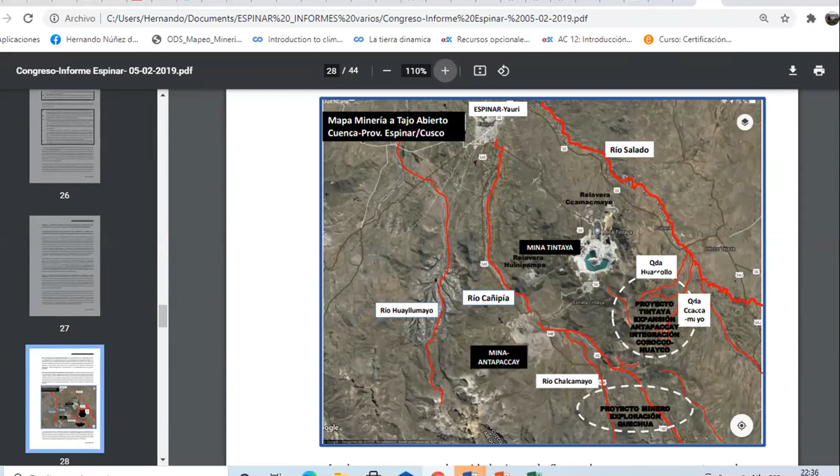It's important to consider the geology because we have outcrops of sedimentary rocks, limestones and sandstone, and also batholithic rocks. The big problem is with calcareous rocks outcrops because they are affected by dissolution phenomena, the karsts. This occurrence also happens in bundles of calcareous rocks, chaotic sedimentation, or olistostromes of various sizes when the carbonate platform collapses.

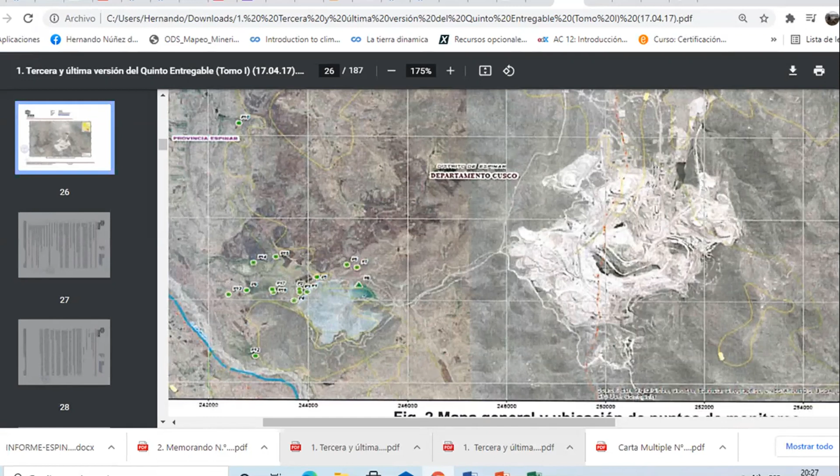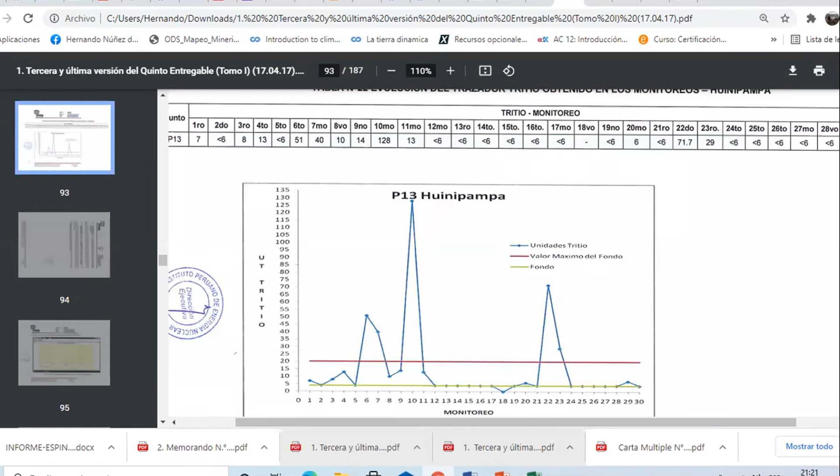In summary, despite the scientific evidence of tailings filtering, the Peruvian state has not been able to reveal the source of the contamination of the water with heavy metals, nor to enforce the rights of the community members who have been seriously harmed in their health and in their means of survival. The next slides show the results of the monitoring: the curve resulting from the monitoring, the evolution in the residence time of the tritium, and the graph that shows the presence of tritium throughout the 12-month period of monitoring.

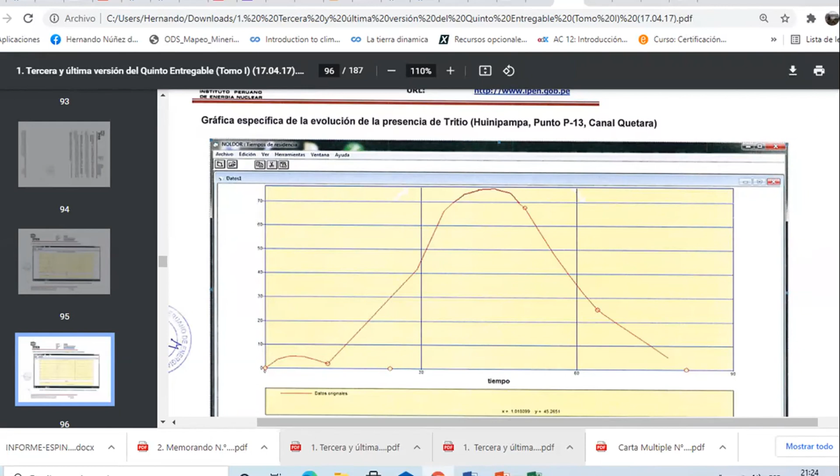What is the perspective? The Xstrata company wants to continue exploiting the area with the development of the Coroccohuayco project, which in the exploration stage has also caused serious damage to the two surrounding communities. The cumulative impacts in the area have not been studied. The company has implemented a management system which does not take into account the existence of the environmental liability or its environmental recovery.

The conclusion: It is crucial to urgently plan the restoration of groundwater and soil contamination in the hydrographic basin and make a remediation plan that considers the reduction of groundwater heavy metals contamination with wells programmed with technical criteria. It's advisable to start the process of restoring ecosystems that have been degraded in the areas of mining environmental liabilities, the PAMs, affecting the productive activities of the population in the 13 communities.

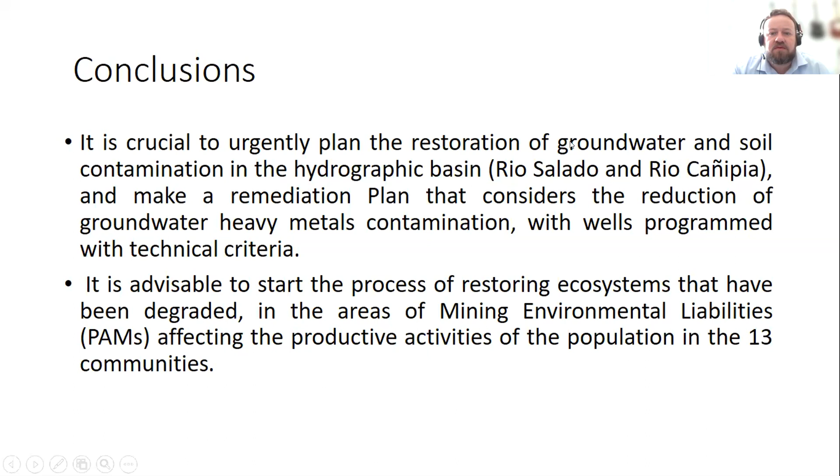Considering the high zinc concentrations, was it considered possible to recover metals before the remediation of the area?

Yes. We're talking with some waste management companies, so we are testing if with this zinc concentration we can do some kind of recycling of this soil, because there is some concentration of zinc in parts of this soil. The first option would be in Spain, but we don't have a place to recycle this kind of material on soils, so it's going to have to go to some parts of Asia. We are studying the problems about sustainability, the quantity, and whether other kinds of metals could be a problem just to recycle. But this is an option we are studying, to recycle this kind of soil. Thanks for the question.

The next question is to Mr. Dortmund. The question is, what does power cap do for the contaminated site?

Power cap's not been designed to remediate the site. Power cap is a renewable energy solution to be placed on top of closure turf. And closure turf, as I highlighted in the presentation, avoids risks like erosion and leachate from the stacking. But power cap, the solar solution in itself, is not a remediation solution. It's a renewable energy solution.